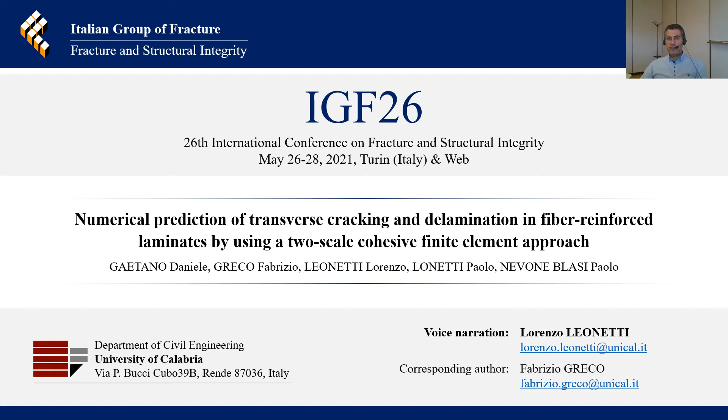The work I'm going to present is about a novel two-scale cohesive finite element model for the investigation of transverse cracking and induced delamination in fiber-reinforced composites. My co-authors are Professors Fabrizio Greco and Paolo Lonetti and Doctors Daniele Gaetano and Paolo Nevone Blasi.

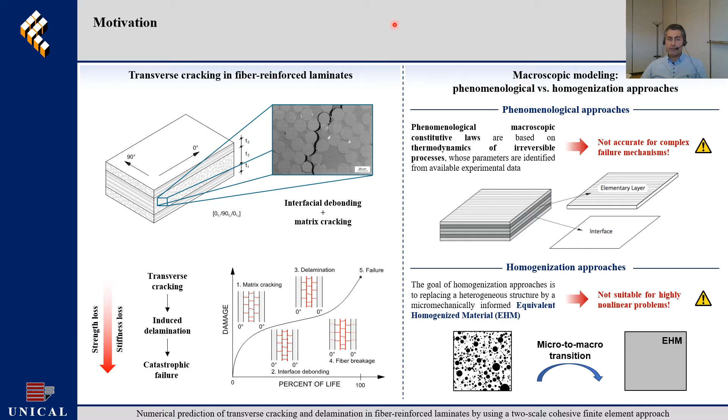Well, let's start with the motivation of this work. As is well known, fiber-reinforced composites may experience several failure mechanisms ranging from transverse cracking to fiber breakage. In order to simulate such damage events, both phenomenological and micromechanical approaches have been proposed in the literature. This introductory slide presents a rapid overview of the most used multiscale modeling approaches for simulating transverse crack propagation in fiber-reinforced composites.

Classical nonlinear homogenization approaches, in which a one-way coupling is established between the micro and macro scale, are very efficient but in general not suitable for handling strain localization. To this end, enhanced computational homogenization approaches have been introduced. In particular, strain gradient and discontinuous approaches have been widely used by virtue of their capability to introduce a length scale into the overall constitutive response. However, one of their main drawbacks consists in their high computational cost.

Some years ago, our research team had already proposed a multiscale model belonging to the class of computational homogenization approaches, which was limited to a single propagating crack and therefore unable to simulate the transition from a diffuse to a localized damage state. Instead, in the present work, a more efficient two-scale cohesive finite element model is proposed based on a combined continuous-discontinuous hierarchical homogenization in which the micro and the macro scales are only one-way coupled.

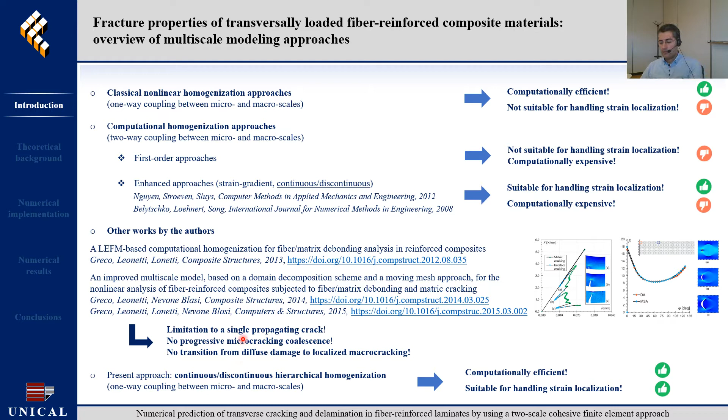The proposed continuous-discontinuous nonlinear homogenization is performed on a properly identified repeating unit cell, which is representative of the assumed periodic composite microstructure. The other hypotheses of this model are perfect separation between micro and macro scales, quasi-static loading conditions, small deformations, damageable fiber-matrix interfaces, and breakable matrix, modeled as a collection of cohesive elements embedded in a continuous phase. Thus, also assuming periodic boundary conditions on the unit cell, a hierarchical homogenization scheme is applied with the aim of deriving the overall nonlinear response of the composite.

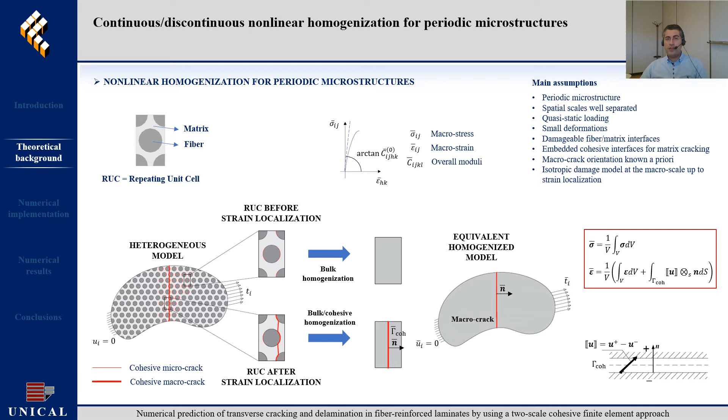To overcome the well-known ill-posedness of the homogenized macro continuum problem in a softening regime, a further homogenization is performed at the interface level as a post-processing step. In other words, the discontinuous part of the numerically derived overall constitutive response is obtained by extracting the portion of the loading curve after the appearance of a macroscopic localization band. Finally, a homogenized traction separation law is derived after suitably defining the microscopic cohesive traction vector and the macroscopic displacement jump. The main advantage of this approach is that a global traction separation law is derived through offline computations in a very efficient manner.

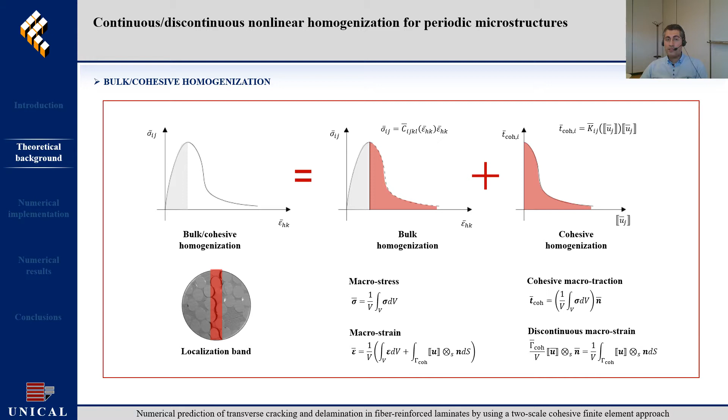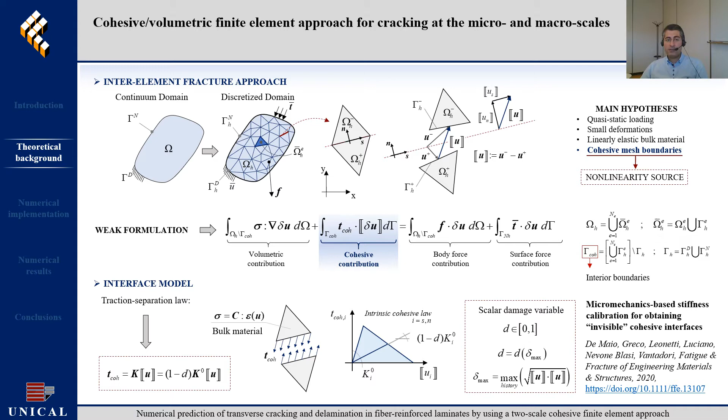In the present multiscale approach, multiple cracking at both the microscopic and macroscopic scales is accounted for by adopting a cohesive volumetric finite element approach. The underlying variational formulation assumes the constitutive behavior of embedded interfaces as the unique source of nonlinearity. It is worth highlighting the presence of an additional contribution in the resulting weak form, which represents the virtual work of the traction transferred by the embedded interfaces. In order to reduce the well-known artificial compliance associated with the adopted intrinsic cohesive approach, a micromechanics-based stiffness calibration methodology recently proposed by some of the authors is used in the present work.

Well, the overall stress-strain response up to localization and the homogenized traction separation law have been computed by using a finite element procedure able to follow the principal path of the analyzed unit cell, in combination with subsequent coupled macroscopic stability analysis for the detection of the macrostrain localization, which involved the solution of 3 independent linear perturbation problems at each loading step. Finally, a post-processing step is performed to extract the homogenized traction separation law from the micromechanically derived stress-strain relation. In order to automate all these sequential computational tasks, an ad hoc MATLAB code has been used within the commercial environment COMSOL Multiphysics.

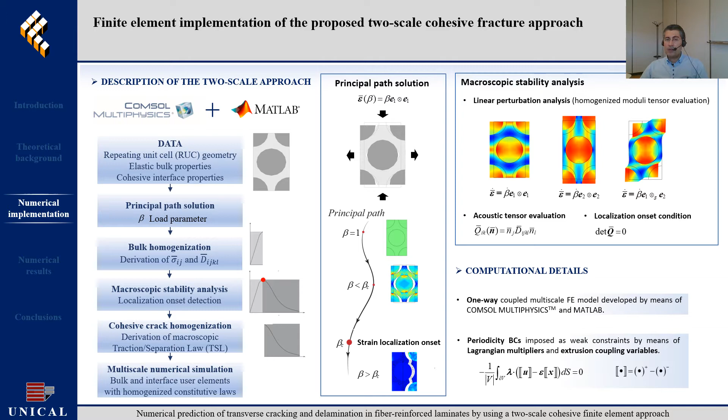This part of the presentation is devoted to the numerical experiments carried out to assess the reliability of the proposed multiscale model. The considered case study is a tensile test performed on a fiber-reinforced laminate made of stacked aluminum and glass epoxy prepreg layers, which is known as GLARE.

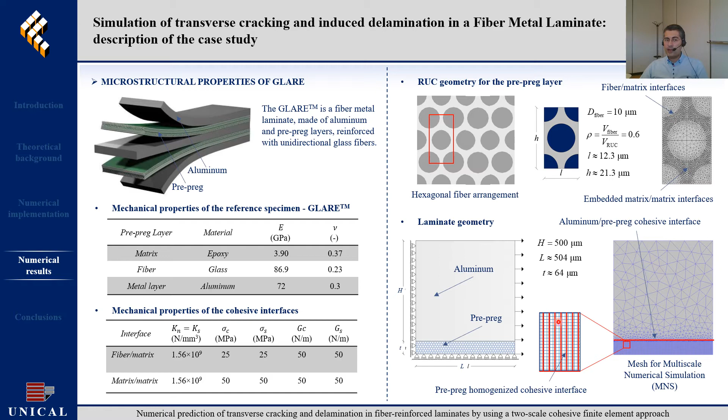Then, the geometry of the simulated portion of laminate is shown, together with the mesh configuration adopted for the multiscale analysis. In particular, the mesh adopted for the prepreg layer is a mapped mesh with duplicated nodes, such that zero-thickness interfaces with homogenized cohesive properties are pre-inserted along the vertical mesh boundaries.

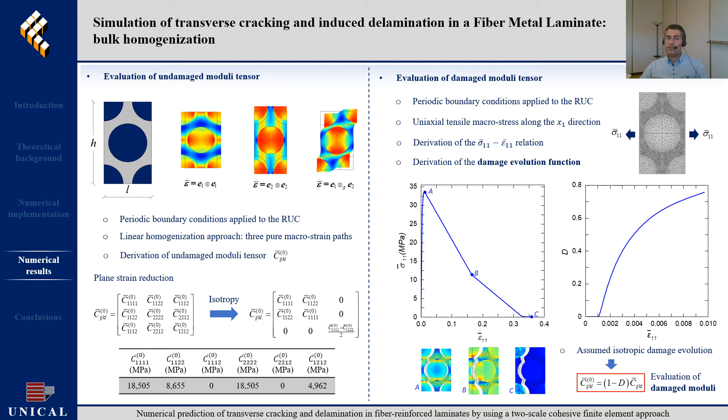Firstly, we present the offline computations performed on a given repeating unit cell to derive the bulk nonlinear response. Here you can find the related numerical outcomes in terms of both undamaged and damaged homogenized moduli tensor. In particular, the damaged moduli are derived by assuming an isotropic damage evolution function, which is directly extracted from the homogenized uniaxial stress-strain curve obtained from the principal path solution.

This slide presents the additional results obtained from the macroscopic stability analysis performed at different loading steps, starting with the incremental moduli. These moduli are used to compute the acoustic tensor, thus allowing the rigorous derivation of the strain localization onset condition. This condition identifies the critical displacement jump by which the homogenized traction separation law is shifted to the left in order to extract its pure softening behavior.

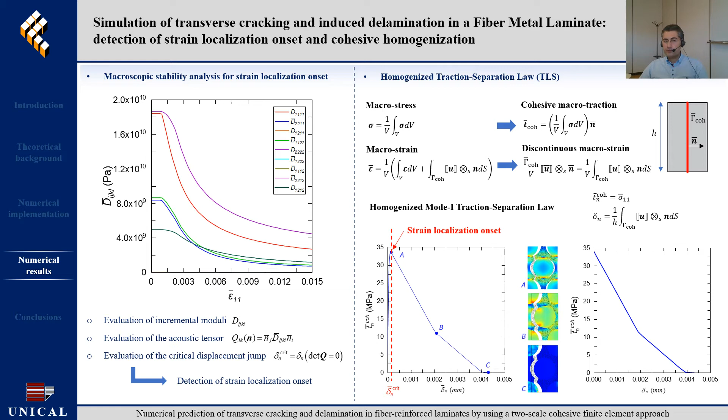The previously mentioned offline computations have been performed for deriving three different databases. That is, a damage evolution function database for bulk homogenization, an incremental moduli database for the detection of strain localization onset, and the traction separation law database for cohesive homogenization.

Please note that the present databases are only valid for a given microstructure, so that they must be recomputed in case of different geometries and moduli contrast, as shown in this slide, where the incremental moduli and the homogenized traction separation law are derived for different values of the fiber volume fraction.

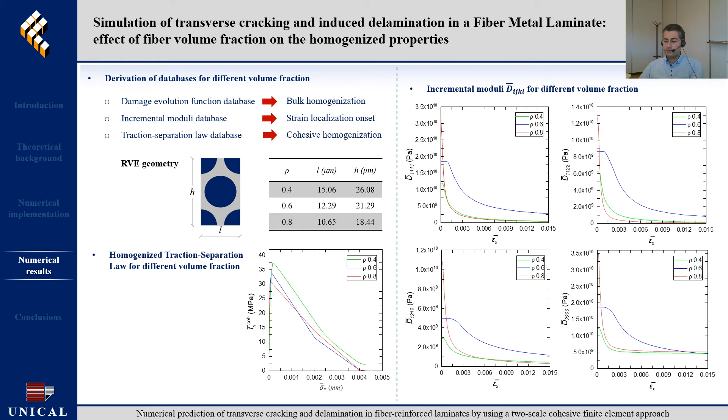After performing the previous offline computations, a macroscale analysis of the considered laminate, here referred to as multiscale numerical simulation, is performed by using as material inputs the previously derived databases. The macroscale response is here reported in terms of global stress-strain relation and homogenized secant longitudinal modulus of the prepreg layer as a function of the applied strain.

As a validation step, the results of this multiscale analysis have been compared with the outcomes of the fully microscopic analysis denoted as direct numerical simulation. In this analysis, taken as the reference, all the microstructural details are explicitly modeled, and both fiber matrix debonding and matrix cracking are included in the same way as in the repeating unit cell analysis.

On the one hand, the good accuracy of the proposed method is demonstrated by the very small percentage errors on the initial stiffness and the peak strength of the prepreg layer. On the other hand, its notable computational efficiency is attested by the very high ratio of about 75 between the number of degrees of freedom for the reference direct analysis and that for the present multiscale analysis.

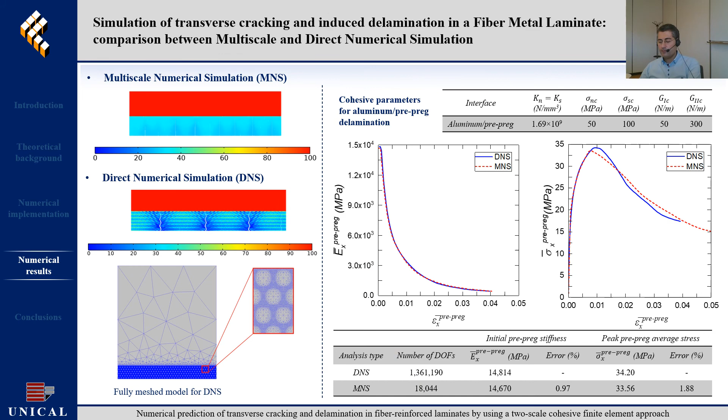As a further assessment of the reliability of the proposed modeling approach, a mesh sensitivity analysis has been performed by considering three different mesh configurations in the prepreg layer. The related numerical results have shown a substantial mesh independence, especially in terms of effective longitudinal modulus.

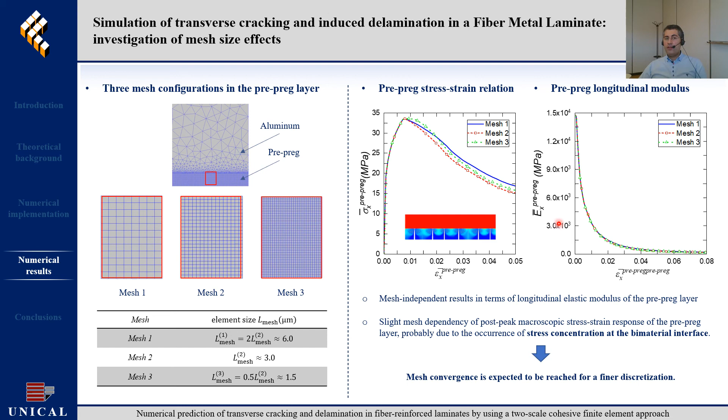In conclusion, a novel two-scale model has been presented, able to accurately predict transverse cracking and induced delamination in fiber-reinforced composite materials. This model adopts an inter-element cohesive finite element methodology for the numerical simulation of multiple cracking at both micro and macro scales. As the main ingredient of the proposed two-scale model, a very efficient offline homogenization approach is introduced for the bulk and cohesive interface constitutive behaviors.

Then, the numerical accuracy and the computational efficiency of this model have been demonstrated by performing suitable comparisons with direct numerical simulations. Finally, a mesh sensitivity analysis has been reported to demonstrate the mesh size objectivity of the present results.